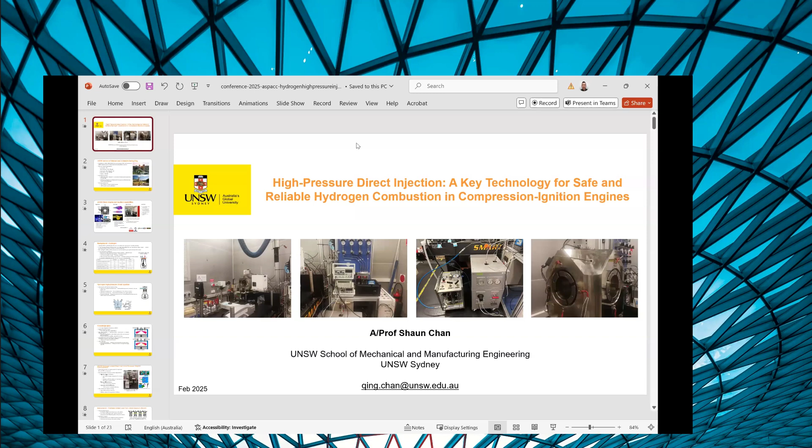Right, Fatemeh, many thanks for your very kind introduction. Are you able to see my screen? It's not in presentation mode, if you please put it on presentation mode. Just going to play around with it a bit. You may click on display settings. Yeah, thank you, perfect. Oh good, thank you, okay, all fantastic, good.

Thanks Fatemeh for your very kind introduction. My name is Shaun Chan, and I work at the School of Mechanical and Manufacturing Engineering at the University of New South Wales, located in Sydney, Australia. Before I start, I'd like to make a quick introduction to my school. It has a long history, established in 1949. Currently the school has approximately 100 staff members and more than 2,500 students across various programs. We are consistently ranked as one of the top universities in Mechanical and Manufacturing Engineering, both in Australia and globally. We are a highly research-intensive school, attracting more than 11.5 million dollars in research income, and publishing more than 400 research publications annually.

In terms of the group I work with, I'm one of the co-leaders of the UNSW Clean Engine Combustion Group, whereby along with two other colleagues, Professor Shawn Kook and Professor Evatt Hawkes, we work with more than 10 HDR students and 3 postdocs tackling various aspects of clean energy combustion. We have the capability to perform extremely fundamental level research diagnostics, as well as practical level engine testing. We also have the capability to model a range of flames using fundamental tools such as direct numerical simulations, and perform practical engine modeling using commercial software such as Converge. We collaborate with a range of industrial partners, and some of the work presented today was done in collaboration with them.

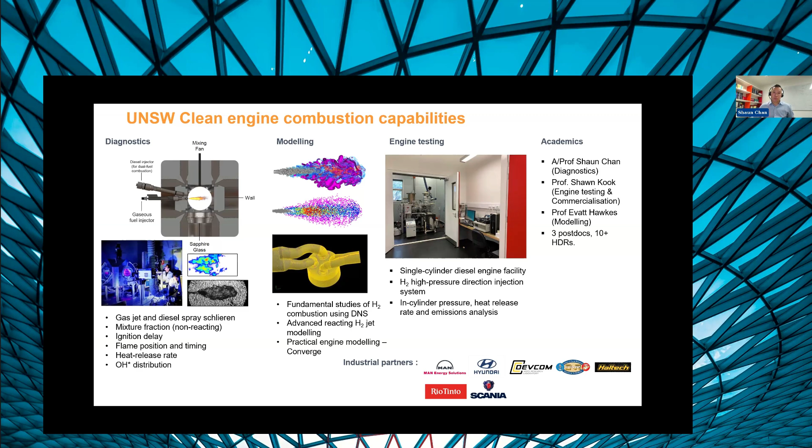Moving on quickly, I'm now going to talk about hydrogen after the brief introduction to the background.

Hydrogen itself is highly attractive, and one of the main reasons is due to its carbon-free properties, as well as potential to be produced from a variety of renewable energy sources.

As a combustion fuel, hydrogen is somewhat attractive due to several properties such as its wide flammability limit, as well as high flame speed. This can potentially lead to short combustion duration, as well as the capability to operate under lean operation conditions, which can be used to enhance the efficiency of the engine process itself.

However, hydrogen does have a couple of challenging properties, which makes it quite challenging when it comes to integrating it into engines for use. If we were to use a more traditional method, such as port fuel injection, whereby the gas is injected during the intake stroke.

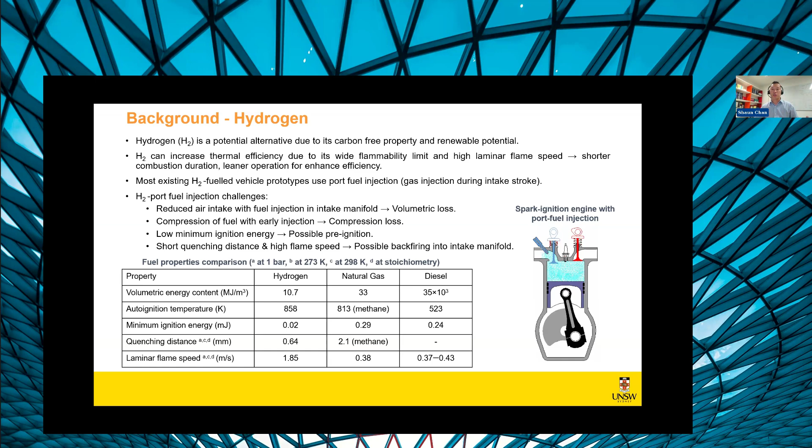So the occurrence of pre-ignition, backfiring, and other phenomena such as knocking could all potentially impact engine operation, and in more severe cases, cause significant damage to the engine itself. These are the number of challenges one has to face when trying to integrate hydrogen into an internal combustion engine.

Given all these different types of challenges, one potential approach to overcome some of the listed challenges is through the use of direct injection method combined with late injection timing. Direct injection, as its name implies, involves the direct injection of the fuel into the engine cylinder itself.

If we were to do this at a comparatively late injection timing, this will ultimately reduce the residence time of the hydrogen within the engine cylinder itself, potentially reducing its exposure to hotspots and deposits, and thereby reducing the pre-ignition risk. In addition, given that the hydrogen is now directly injected into the engine cylinder, this will ultimately mitigate the air displacement issues, such as described when it comes to the port fuel injection method.

Given that the hydrogen is now introduced into the cylinder directly, there's no backfire risk in the sense that the fire would now propagate back to its point of introduction, which is located within the engine cylinder itself. Last but not least, the late injection strategy combined with the direct injection method could be used to manage the compression work that's required to compress the fuel.

This also opens up different pathways when it comes to optimization of the performance of the engine, such as the redirection or reorientation of the injector just to enhance the performance of the engine itself. So these are the benefits associated with the use of direct injection strategy when it comes to the integration of hydrogen into engines.

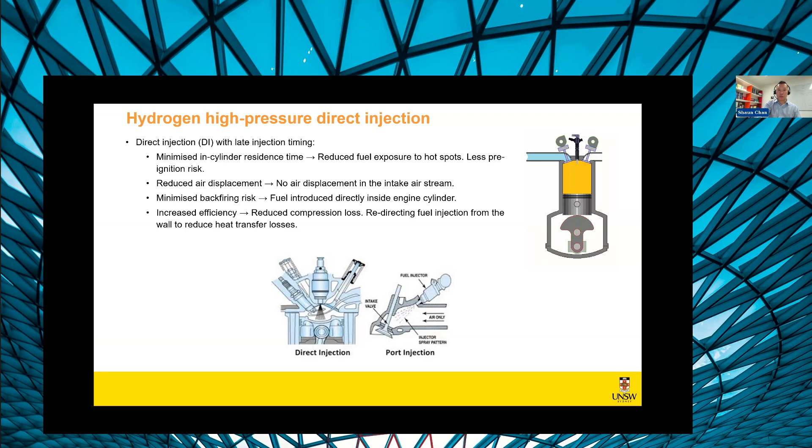Now, despite addressing many of the challenges through the use of direct injection, hydrogen itself still has a pretty challenging property, which is its high auto-ignition temperature that's considerably higher than some of the conventional fuels. What this basically means is that if we were to just directly inject the hydrogen into the engine, it would not be easy to compress and ignite it unless we make some modifications to the engine itself.

So a lot of the research groups, including my own, have looked into the use of alternative methods just to assist with the ignition of the hydrogen jet itself. Some of the methods include the usage of spark plug, glow plug, or in our group's case, we favor the pilot diesel method due to the competitive advantages that it offers.

The pilot diesel can be used to create a high temperature environment to facilitate the ignition of the hydrogen jet itself. The advantage of this method is that it's possible for it to create multiple ignition sites within the engine cylinder itself, thereby providing a more robust ignition performance.

In addition, given that we are using pilot diesel to ignite the fuel, it's also possible for us to increase the energy share coming from the diesel itself in the event whereby we increase the contribution from the diesel, should the operation require it. This provides the system with an additional layer of robustness to handle the different operation requirements that one may face, depending on the sector that you're working in.

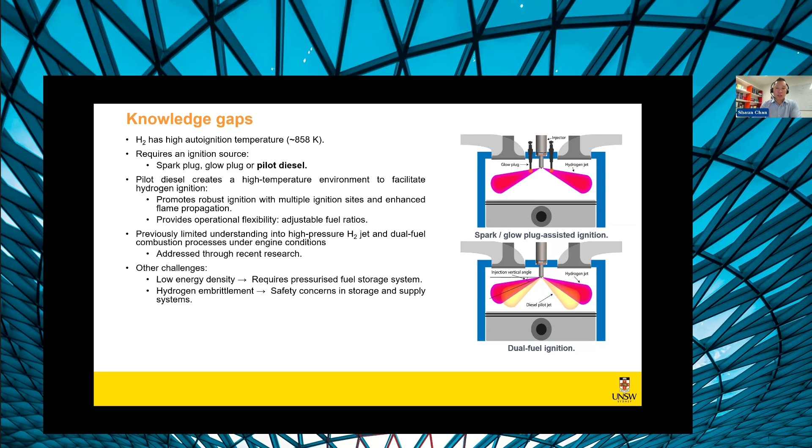Before we go into the technical details, it's worthwhile looking back at what we could potentially achieve if the technologies were implemented to their full extent. Our group has performed engine testing at the University of New South Wales, implementing the hydrogen diesel dual fuel direct injection technique. This demonstration was conducted in a compression ignition engine with varied bore sizes ranging from 50 up to 100 millimeters.

With our recent test, we were able to demonstrate that using this technology, we can achieve a high energy substitution up to 90% for hydrogen. In other words, 90% of the energy in this case is actually coming from the hydrogen, with the remaining 10% coming from the pilot diesel.

One thing of note is that this does not represent an upper limit of the technology itself, rather it's an indication mainly arising from the limitation of the injection hardware that we are using. There's no reason why we can't go further than what is currently demonstrated.

This 90% is approximately 2 times greater than what has been previously reported in the literature when it comes to the usage of hydrogen port fuel injection, whereby a typical upper limit of 30 to 40% has been observed over a comparative range.

Given this high energy substitution, we will also observe a significant reduction in terms of carbon dioxide emission, as well as an increase in the indicated efficiency as compared with the diesel baseline, which is probably attributed to these highly favorable combustion properties of hydrogen.

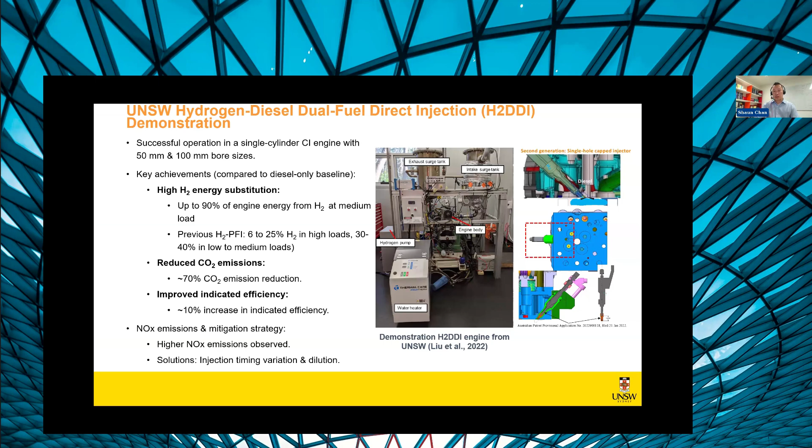With hydrogen, one of the main concerns would be NOx emission, and indeed, with certain injection strategies, we do observe an elevated level of NOx emission, going up to 3 times as compared to diesel baseline. But as we have demonstrated in our studies, with slight adjustment of injection timing variation, as well as the usage of other strategies, it's quite possible for us to maintain an efficiency and a NOx emission comparable to that of the diesel baseline, while retaining the significant carbon dioxide emission reduction ability of the technology itself, making it highly attractive for use.

When it comes to conventional fuel, the fuel ignition is mainly triggered through the compression within the cylinder itself, whereby the occurrence of ignition is largely dictated by the fuel type, the timing at which the fuel is introduced, as well as the engine parameters itself.

Now, when it comes to dual fuel compression ignition engine, given that we are introducing this additional fuel into the system, sometimes with the use of a separate injector, this opens up a variety of parameters that we have to control, adding a layer of complexity to a certain degree, but also providing us with the opportunity to optimize the engine performance even further than what we were able to achieve with the conventional compression ignition engine.

Some of the parameters that now become variable include the timing and injection sequence - when do we introduce the fuel relative to one another, and in what sequence should we be introducing the fuel. There's also the injection duration - through variation of injection duration, we can change the energy share coming from each fuel, which is one of the most important characteristics of this technology, something I'll discuss in detail in the subsequent slides.

The jet interaction angle would be important as well when it comes to dual fuel combustion, given that the hydrogen in this case does not ignite on its own, and its ignition is largely reliant on the contact between the pilot diesel and the hydrogen itself. So all these are different parameters that can influence the combustion performance of the dual fuel process.

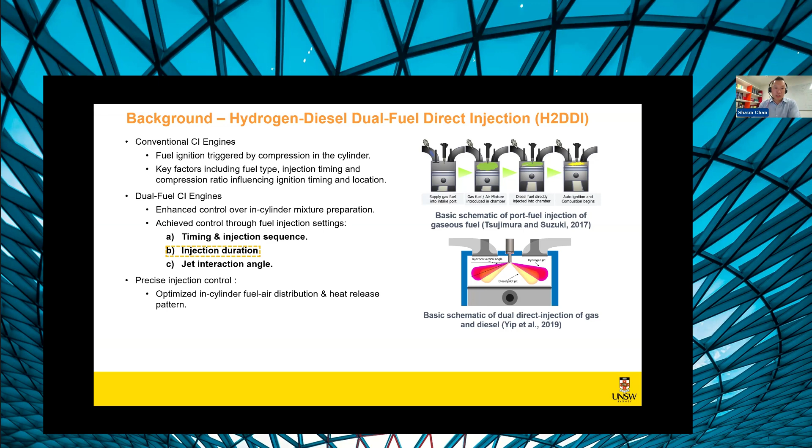I'm going to go through some of the data that we acquired in our laboratory. And before I do that, I think it would be a good idea to give a brief introduction into some of the techniques that we're using.

What you see here is the constant volume combustion chamber that's optically accessible. This chamber can generate the high temperature and pressure conditions that one typically expects to experience in the model engine range. The jet fuel of interest will subsequently be injected into these high temperature and pressure conditions that have been simulated within the chamber itself.

The technique that we're using here is known as Schlieren imaging. It's essentially comprised of the introduction of parallel light rays through a series of optics, which are subsequently directed through the combustion volume chamber before the parallel lights are eventually projected onto the high-speed camera itself.

When the fuel gets injected into the chamber, the high-speed jet prior to ignition, we can actually trace the perturbation that it introduces to the background signal to understand how the jet is developing. On top of that, when combustion occurs, this leads to the generation of gases of different density compared to the background, so the presence of the density gradient will deflect the parallel light away from its original path, and this manifests as dark contrast when captured on the image.

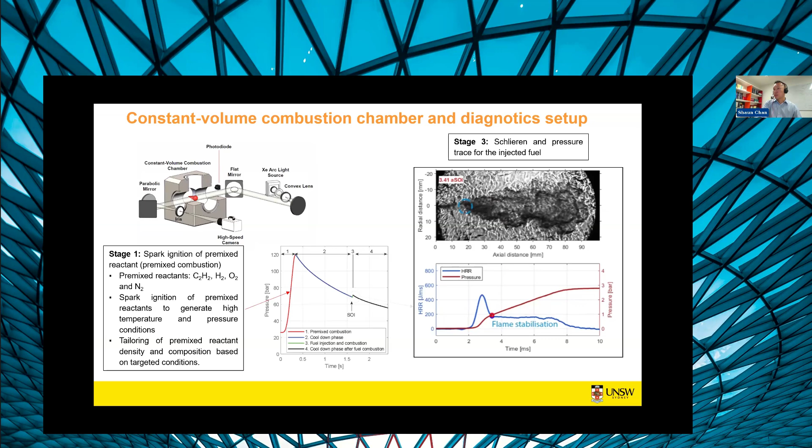When it comes to studying dual fuel combustion, we are essentially injecting both the diesel and the hydrogen into the same hot environment, but in this case we are introducing two fuels rather than one.

If you look at the video we acquired, the hydrogen comes into contact with the diesel that's injected at a slight angle with respect to the horizontal axis, and upon contact you see the flame subsequently propagating throughout the jet.

More importantly, what's interesting here is that the combustion actually propagates all the way back onto the nozzle itself, which is different from what's typically observed with more conventional fuel. This perhaps suggests that this propagation of the flame back to the nozzle during the injection period indicates a stronger, higher heat transfer from the hydrogen flame back onto the nozzle.

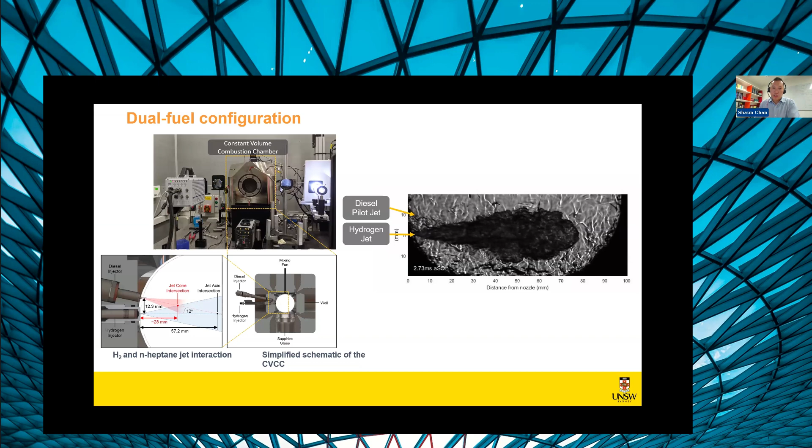This is something we have to bear in mind when running the engine using this specific technology, because this increased heat transfer could potentially impact injector durability, so that's something we need to assess.

There used to be a lack of data, but this has been addressed through some recent research efforts, some of the findings which I'll be sharing in the subsequent slide.

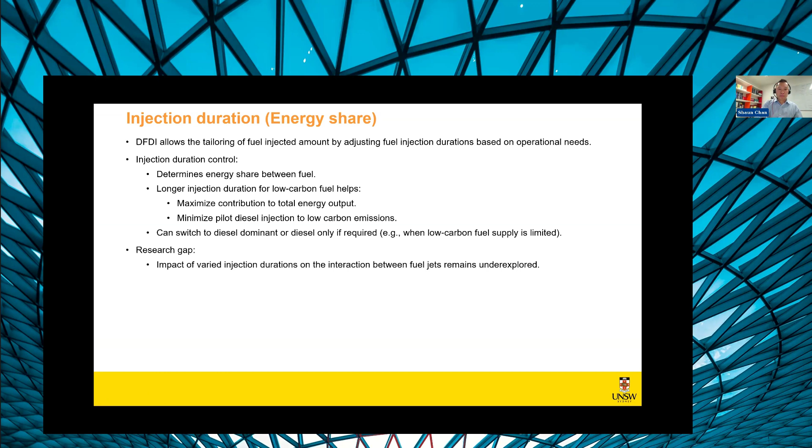For this specific set of experiments, we conducted it in a controlled constant volume combustion chamber. In this case, we fixed the total input energy into the chamber while varying the energy share coming from each of the fuels.

Given that there are different types of parameters that could impact the performance of the combustion process, it's important to minimize the effect of these other parameters as much as possible. So in this case, we maintained a converging configuration while ensuring a near simultaneous injection strategy.

We have conducted the experiment over a range of oxygen concentrations, but in the interest of time, I will only be presenting results acquired under 21% oxygen concentration. For comparison, we have also acquired some reference cases, namely single fuel injection cases under similar conditions, just for cross comparison.

All these cases are conducted under an ambient condition of 5.2 megapascal, as well as an ambient core temperature of 890 Kelvin. For ease of reference, we have come up with acronyms whereby the numerical numbers after each letter indicate the energy share coming from the different fuels. H90D10, for example, would indicate a case whereby the energy share coming from hydrogen is 90%, with the remaining 10% coming from diesel itself.

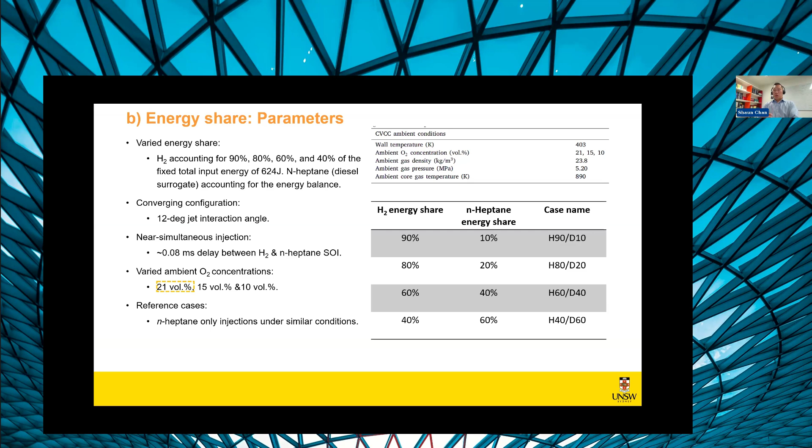Now, what you see here are the Schlieren images, as well as the apparent heat release rate profile coming from each of the cases. The cases located at the top correspond to the case whereby most of the energy share is coming from hydrogen, whereas the image located at the bottom corresponds to the case whereby most of the energy is coming from diesel itself. All these experiments were conducted under an ambient condition of 21% oxygen concentration.

If we look at the Schlieren videos that have been captured, what's interesting to note is that under the conditions which produced this data, the diesel will actually ignite externally to that of the hydrogen jet. This basically implies that under the configuration and ambient conditions we selected, the ignition of the diesel jet will not be impacted by the presence of the hydrogen jet itself.

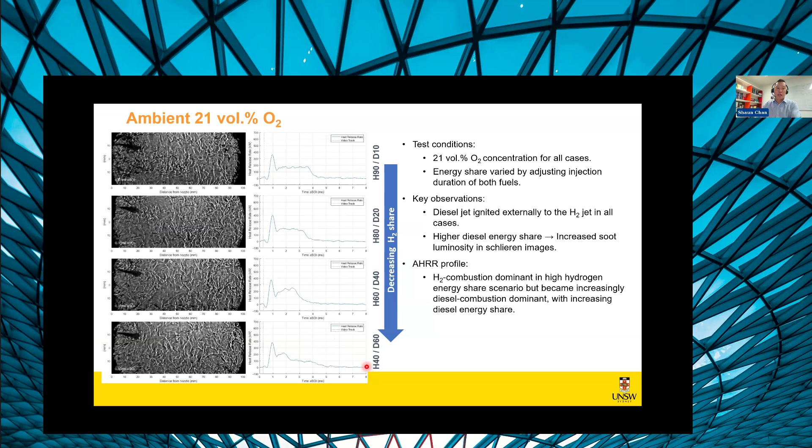One thing of note is that under the conditions whereby a majority of the energy is coming from the diesel, you actually see a lot more luminosity, which is typically indicative of the presence of soot. This is something to be expected given the carbon intensiveness of the diesel jet itself.

If we were to analyze this on a frame-by-frame basis, instead of just looking at the videos, we're going to be looking at the frames. Again, the schlieren images presented at the top correspond to the case whereby a majority of the energy share comes from hydrogen, whereas the case at the bottom, a majority of the energy share comes from diesel. The schlieren images shared from left to right correspond to frames acquired as a function of time after the start of injection.

The blue line here indicates the boundary of the non-reactive hydrogen jet. The red line indicates the boundary of the pilot diesel jet in this particular case. The green line corresponds to the boundary of the reactive cases. What you see on top are the images captured for the dual fuel cases, whereas what you see at the bottom are the single fuel references injected into the same conditions as the dual fuel cases, but without the presence of hydrogen. The yellow boundary you see at the top is pretty much an overlay of the boundary of the single fuel reference on the dual fuel cases, just to ease visual comparison.

If we look at the images selected for more detailed analysis, one interesting thing is that in the case of single fuel injection, you see the formation of a luminous zone at the head of the jet, which gradually diminishes over time. Whereas in the case of the dual fuel cases, the interaction of the diesel jet with the hydrogen jet would actually inhibit and reduce the amount of luminosity that can be detected. This suggests that the interaction of both jets could have an impact on the combustion as well as the soot processes itself.

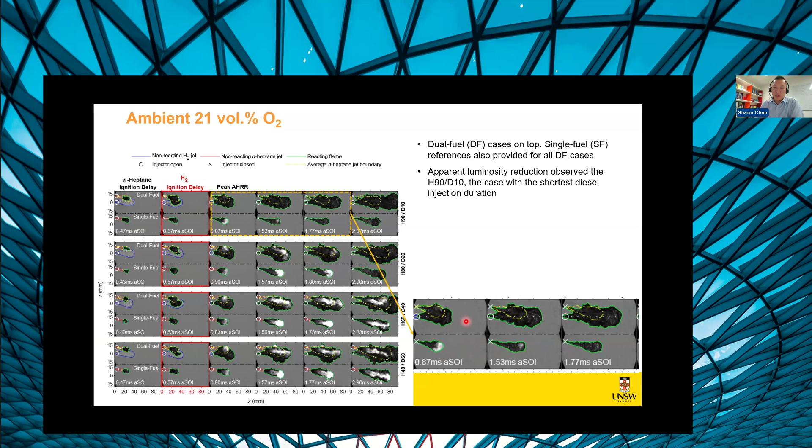In addition, if we focus on the measurements collected for the cases whereby a majority of the energy is coming from diesel, there are also a couple of interesting features. One being that in the case of the dual fuel cases, if we compare the distribution of soot relative to the single fuel reference, you see that the soot zone, the axial length of the soot zone, will actually be prolonged.

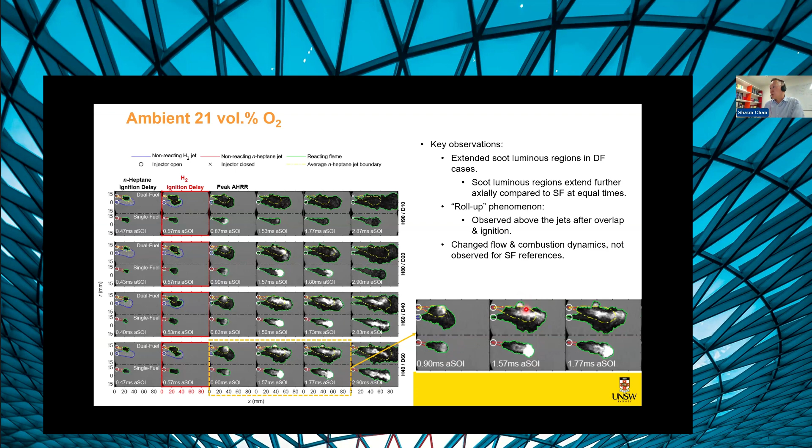And in addition to that, we are also seeing some interesting features being formed at the upper boundary of the jet itself. So if we play the video we acquired for this case and focus on the zone located right below the cyan arc, what you see is that upon ignition, there will be an upward counter-rotating region formed with certain luminosity that gradually diminishes as the flow structure moves downstream along with the jet itself.

This is something that's simply unobserved in the single fuel reference. And it's also not observed on every single run, but the frequency is comparatively high. The frequency does change as the ambient oxygen concentration changes as well, so the frequency of detection actually diminishes as the ambient oxygen concentration drops.

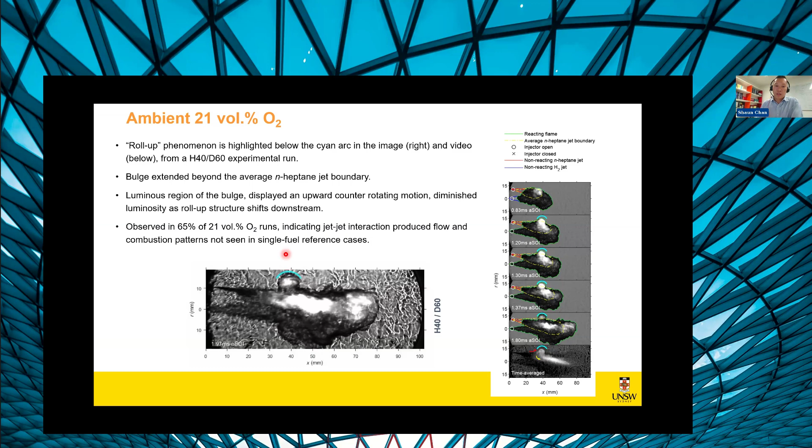So all these are demonstrations of how these dual fuel processes could potentially impact the mixing as well as the combustion processes of the dual jet, and something we should pay attention to when using them in the engine itself. I'm just going to go through one last set of results prior to ending my presentation.

So in this case, a series of measurements have been collected for different cases. On the left, you have all these measurements conducted whereby a significant share of the energy is coming from the hydrogen. And at the other end of the spectrum, this is a case whereby a significant share of the energy is indeed coming from the diesel itself.

Intensity in this case measures the luminosity coming from the flame. A higher value is typically indicative of a greater amount of soot, and vice versa. Last but not least, we also track the evolution of the flame base, seeing how it's stabilized with respect to the nozzle.

Now, one thing that's interesting is that if we look at the dual fuel versus the single fuel reference, what we see here is that the dual fuel process is actually a lot more efficient than the single fuel reference.

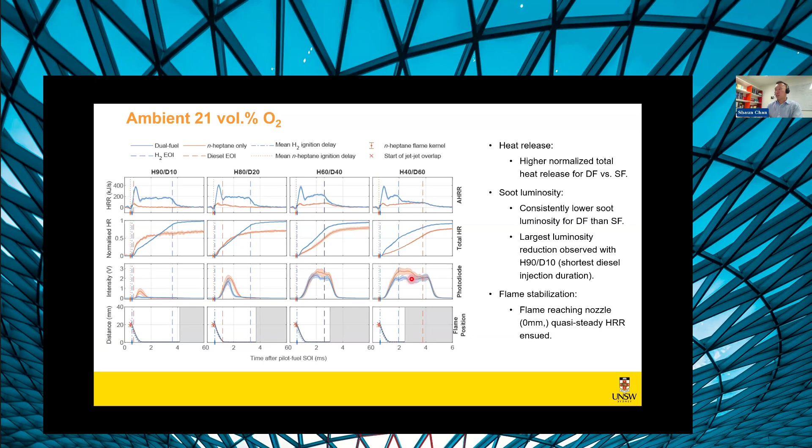When it comes to photodiode, what is interesting to note is that the intensity from the dual fuel cases is comparatively lower than what is typically observed in the single fuel references. This is despite the prolonging extension of the soot zone as well as the formation of the recirculatory zone. So these are the interesting features that we are observing.

So just a final quick two notes, I know my time is up. There are many questions on how this technology could potentially offer the most competitive advantage.

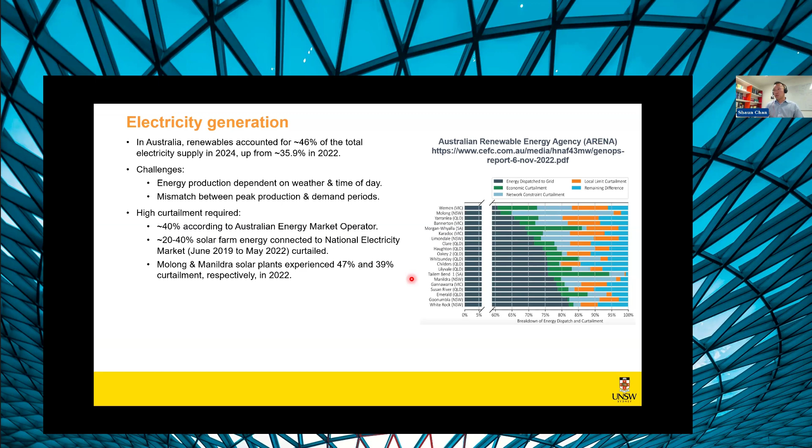One sector where this could be applied is electricity generation. There's increasing penetration of renewable energy into the grid in Australia, and many of these renewable resources are highly intermittent, with production highly dependent on weather and time of day. This has led to destabilization of the grid, necessitating corrective actions such as curtailment. Whilst curtailment is highly effective, it also leads to some kind of loss for the plant operators.

With hydrogen-diesel technology, in the case where you have excess energy, that energy can be stored as hydrogen. The hydrogen engine now offers a pathway at which this gas could be converted back into energy, to assist with grid stabilization, especially when there's a mismatch between demand and supply.

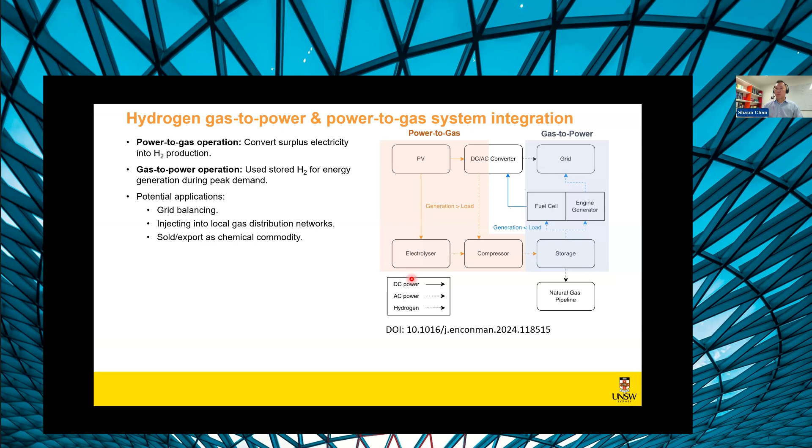Last but not least, this could potentially be used to assist with hydrogen export as well. Australia's national strategy is targeting global leadership in both production and export by 2030, and to achieve that it's important to find a cost-effective long-distance hydrogen transport solution.

One issue we face when transporting liquefied hydrogen is boil-off, where some of the liquefied hydrogen gets converted into gas during transportation. This can lead to over-pressurization, presenting a safety risk, and in most cases the hydrogen has to be vented off to maintain pressure, which represents another safety concern.

With hydrogen diesel dual fuel technology, there's a possibility that this boiled-off hydrogen can be used to fuel the motion of the ship itself, therefore changing the transport economics.

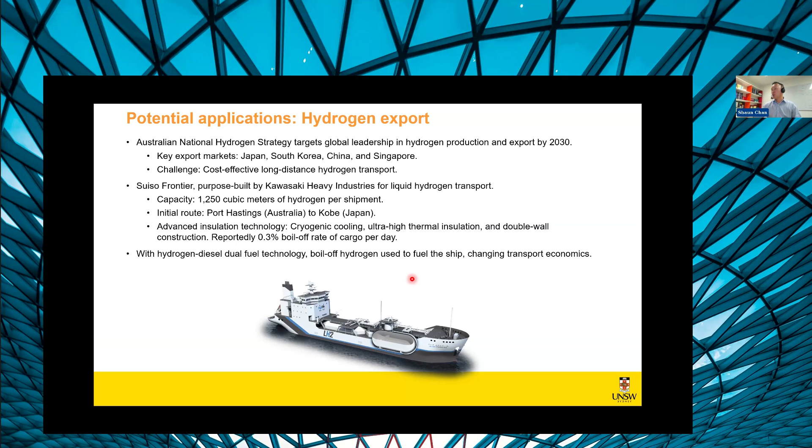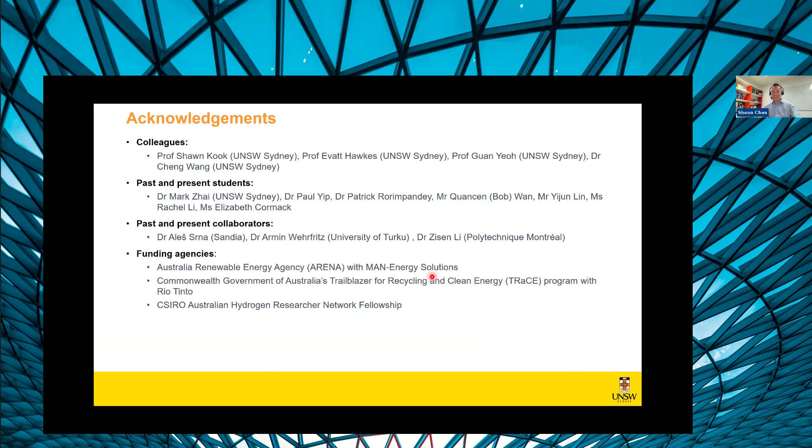Thank you. Thank you very much, Shaun. I appreciate it. It was an excellent presentation, and I've learned a lot.

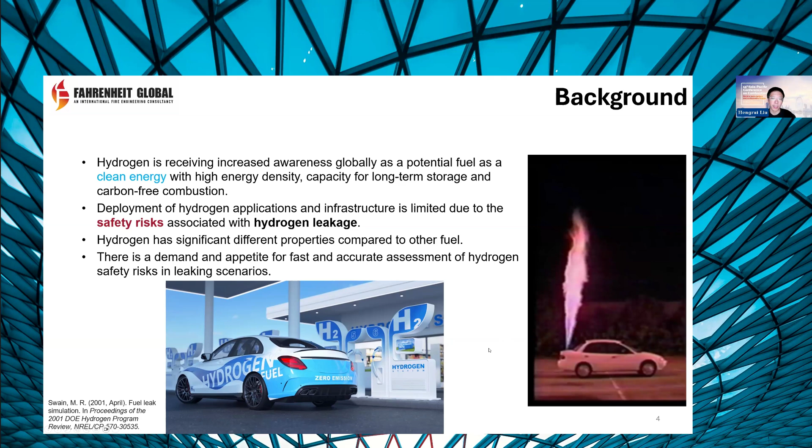So there is definitely a demand and appetite for a fast and accurate assessment of hydrogen safety risks, especially when we are wondering if they are leaking or not. So as I said, experiments lay our foundation for our numerical work.

We have a capacity of adjusting the lab to make a slope, basically in a tunnel scenario or in a chamber scenario, to have a bit of slope. And we have a capacity as well - sorry, I may not get my laser - right, we have also the capacity of introducing wind to model basically how to simulate a natural ventilation condition or mechanically ventilated condition.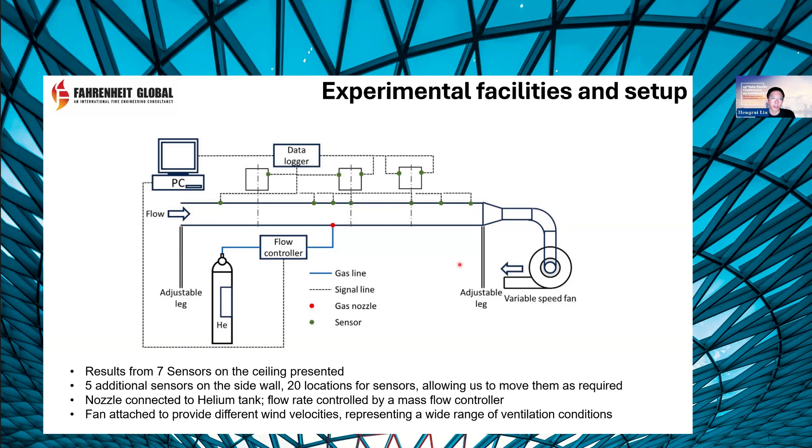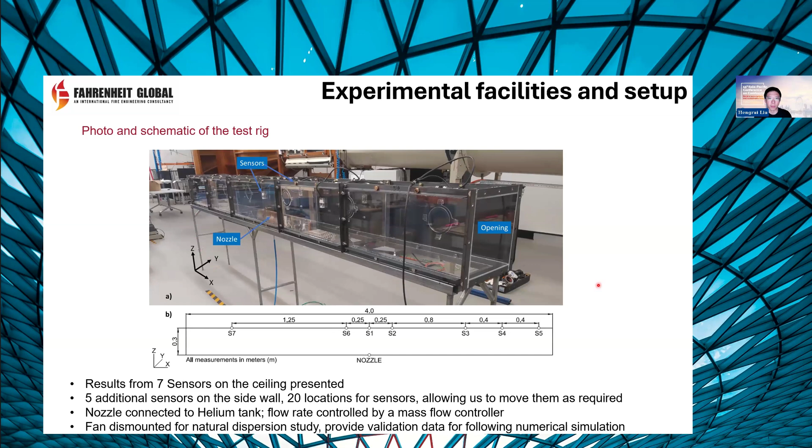So this is basically a photo of what you've just seen in the sketch. We have sensors, as we said, attached on the side of the walls and top of the walls. We have a nozzle connected to the flow regulator and connected to the tank as well. So here is basically the adjustable leg, we can use that to create a slope. And with the opening, whether or not we attach it to a fan, we can create a natural ventilation or forced ventilation scenario. And we've been using this experimental rig, the Macquarie chamber, a lot - that's basically formed our foundation for the next few projects.

First thing first, I'm a CFD guy, computational fluid dynamics. And most of our CFD analysis here I'm going to present today are done in cooperation with FLACS and with Gexcon. So FLACS is the software we're using, and it's specialized for hydrogen dispersion and explosion, and for other fields as well - dispersion and explosion. It's developed by Gexcon, and its beauty is that it's very easy to use, and they have a porosity distributed resistance concept, so basically you don't have to worry too much about your mesh generation and things like that.

Basically what it does is on the intersection or interface of fluid and solid of our obstruction, it makes a portion of that cell being accessible or inaccessible, which is the porosity, we call it here. And it's also having the ability of using a simple k-epsilon RANS model to have it computed more efficiently and suitable for this case as well.

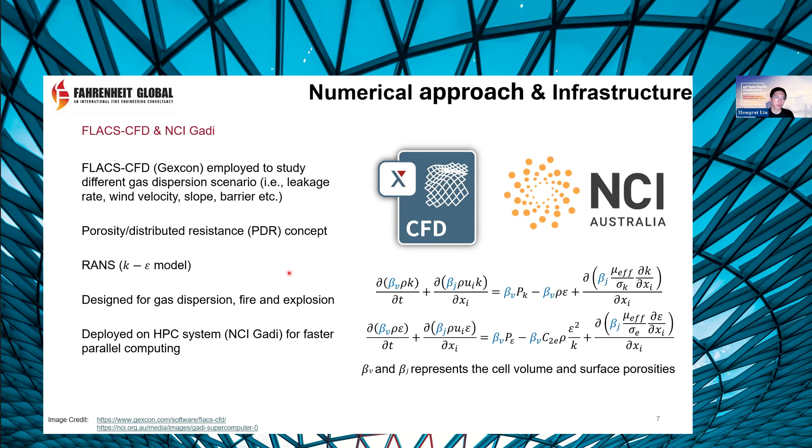And we are also using NCI Gadi as our computational platform. It's an HPC platform governed by the Australian government, and we should be able to deploy and run large parallel simulations on it, with the benefit of fast simulations coming in.

As always, we need to validate our simulation, and we do this using our experimental studies, as mentioned before. We use helium, and we are using a pure dispersion scenario, meaning we don't have any slope and no fan attached to the side. The gas, helium or hydrogen, is injected from the nozzle up here, and we let it disperse naturally. We use this very basic scenario as our validation.

As we see from the results here, surprisingly - or actually not surprisingly - the numerical data actually agrees very well with the experiments. We are having our error controlled within 10% in most cases. This is exciting news, basically meaning that our model works and would predict the flow scenario pretty accurately.

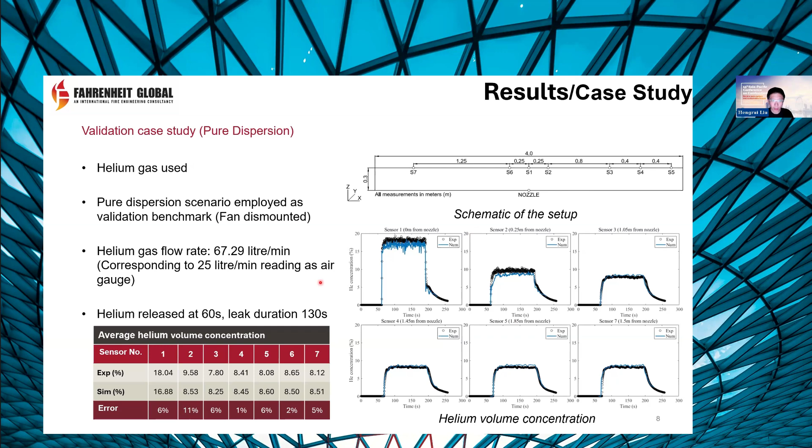And the beautiful thing about CFD is that we can visualize and obtain a lot of things that we cannot easily see in experimental studies.

For example, this one is the validation case study, the pure dispersion study. We can see as time goes by - I'm cutting the gas concentration at 4%, because that's the lower flammability limit of hydrogen. So when we see gas concentration above 4%, we know it's a dangerous zone with potential for ignition and explosion. So we see how the dispersion goes and how the dangerous or critical layer drops down and gets stabilized in such a scenario.

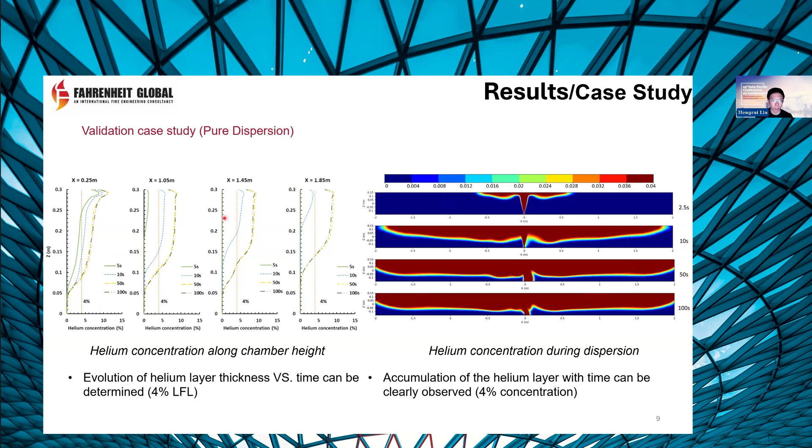At 2.5 seconds, it's just starting to disperse. At 10 seconds, it's basically dispersing around. At 50 seconds, it's already stabilized. At 100 seconds, you don't really see too much of a difference. We can also see at different heights and different locations of the cross section when it reaches that 4% critical line.

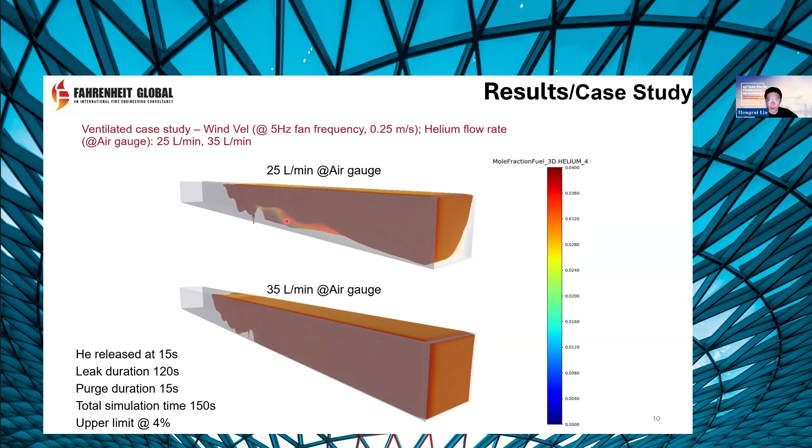That's our validation study, and as I said, with the beauty of CFD we can visualize a lot of things we otherwise cannot. We did not really expect that the ventilated case study would show not very symmetrical behavior in terms of the critical layers or how much of the chamber has been occupied by the gas. So if we go to the next one, we have this ventilated case study as well.

I'm just presenting a small ventilation velocity, and we can see whether or not the dangerous gas has been successfully purged from the chamber itself. We see that if we don't have enough velocity or ventilation, the second half or later half of the tunnel will still be in danger - it's a failed purge scenario.

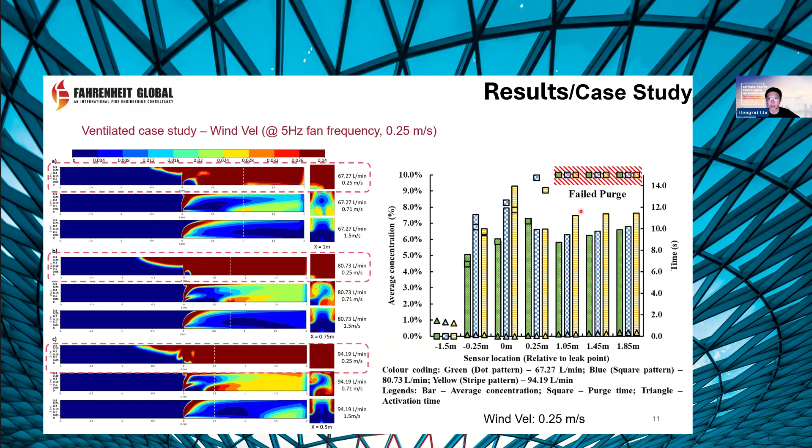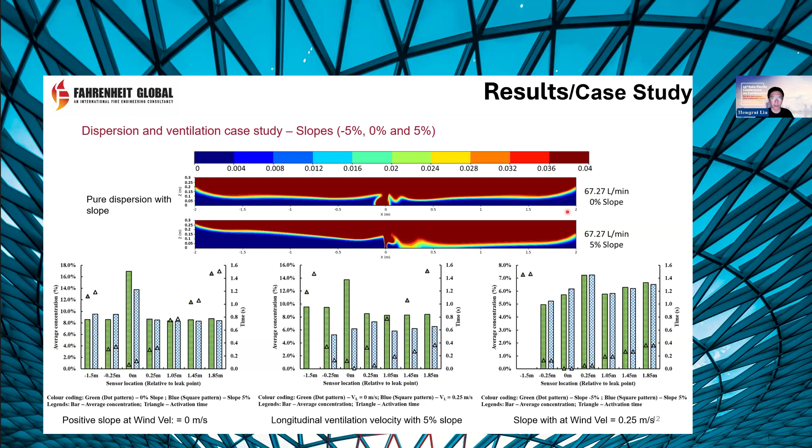During this study, and our own study as well, there are many questions asked. The main question is: how different is it, and is helium a good surrogate of hydrogen? What's the difference between them in terms of modeling and experiments, in terms of dispersion? Will that be critically different? As we see, hydrogen and helium basically differ in their density, and diffusivity is their major difference.

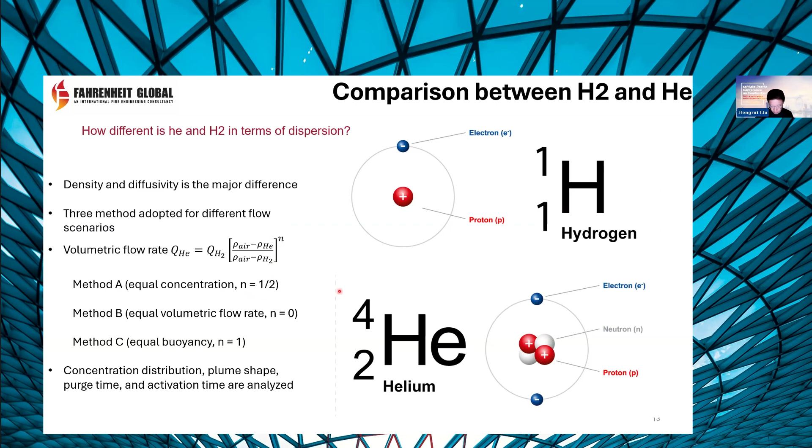So we did a numerical comparison as well, adopting three methods: equal volume, equal concentration, and equal buoyancy, by cleverly and smartly adjusting this n exponential number. This lets us compare the differences between helium and hydrogen. Here we see, in a pure dispersion scenario, hydrogen and helium don't really seem to have too much of a difference.

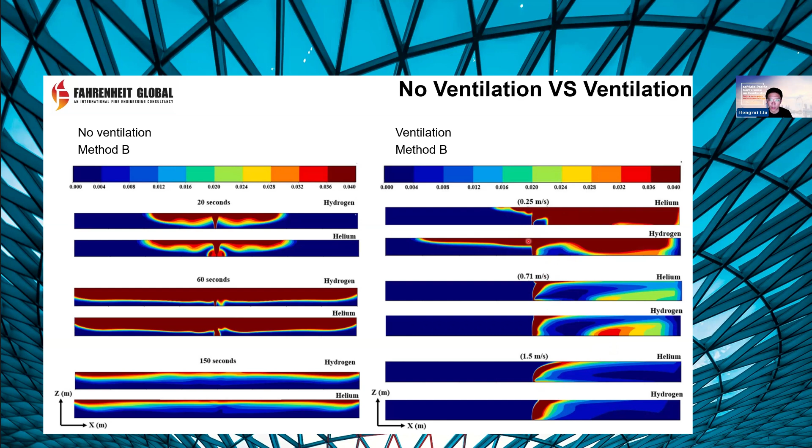In a ventilation scenario, you do see some differences, especially in different ventilation conditions. In a higher condition, you don't really see much difference, and even in a bit of a higher velocity condition, you don't see too much of a difference. But in a lower velocity condition, due to the much higher diffusivity of hydrogen, you will see a much higher concentration field upstream as well.

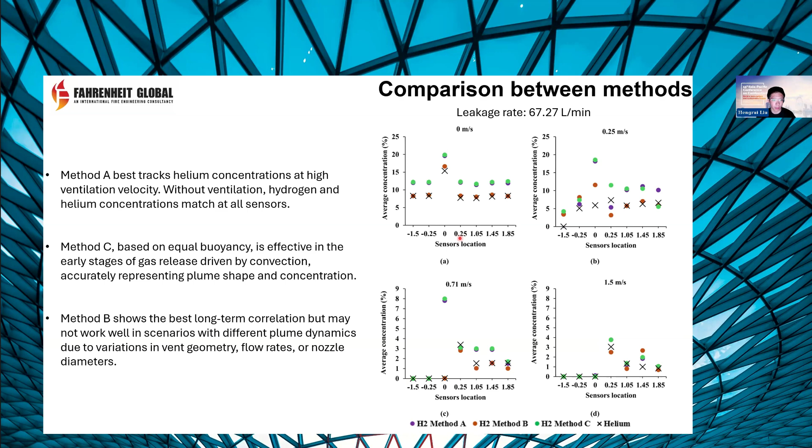Comparing methods A, B, and C—basically equal concentration, equal volumetric flow rate, and equal buoyancy—we find that in most cases method B, which is equal volumetric flow rate, is the better one to choose. But A and C work better than B for specialized cases, like if you're concerned with the beginning of hydrogen dispersion or gas dispersion, or if you're looking at plume shape or concentration, where C gives a better presentation.

We further expanded our study. We all know that CFD studies give a fast track and more potential for accessing data, but they still consume time and computational resources, and require more experience. So there's a need for faster predictive models, and we need a lot more data than what we can gain from experiments and CFD studies alone.

So we introduced machine learning, using data-driven models to help expand the database or data region we can work with, and to potentially give us fast predictions and insight into potential scenarios. We are using a low fidelity data model and a high fidelity model.

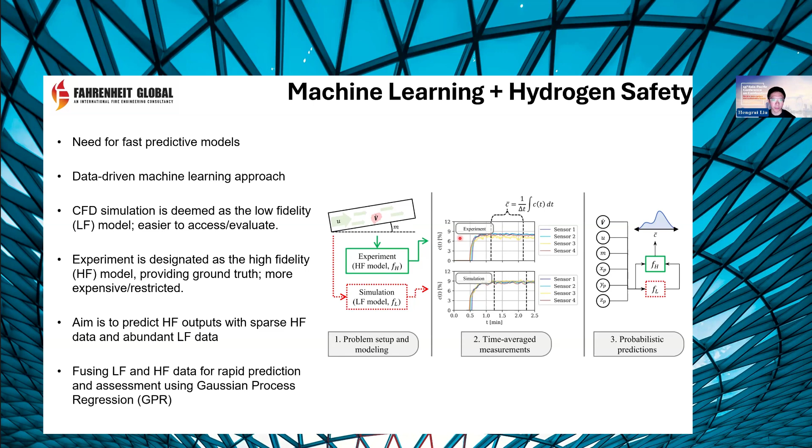As I said, the foundation is experiment. We consider experimental data as high fidelity and simulation as low fidelity. We use this model to combine, merge, and fuse all this data together, and to optimize the training method or our model to obtain a good prediction using a fusion of low and high fidelity data. Our aim is to use this data set to predict high fidelity data as well.

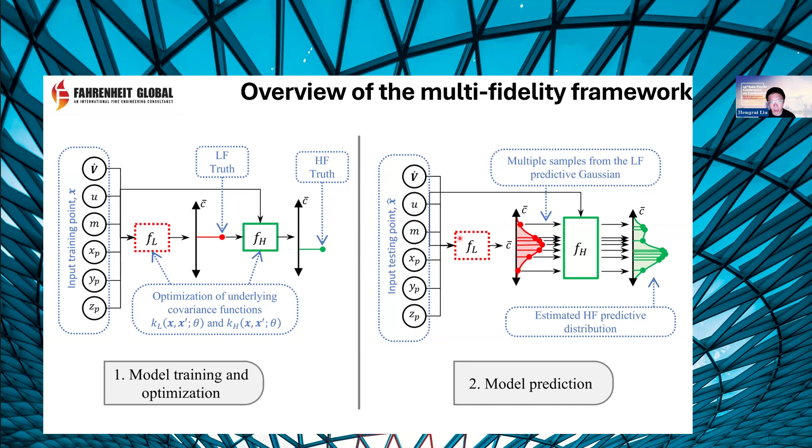In some cases we don't have the simulation run or the experiment done, but we still want this insight. Can we predict that from this machine learning model? The answer is yes—it's working great in some of the scenarios, definitely.

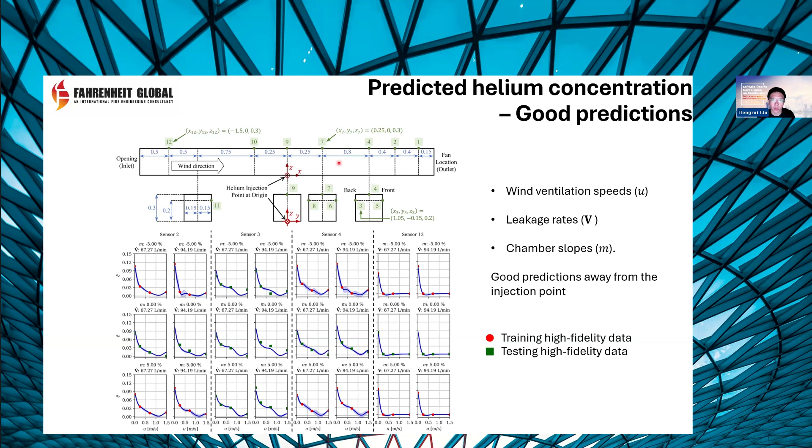As you see on the bottom, we're showing the prediction, and it agrees pretty well with both high fidelity and low fidelity data. It's making good predictions, especially when we are away from the injection point, where we don't expect too much fluctuation of the gas concentration or too much change in gradient. Around these points, we have a good prediction from the model.

However, as a model is a model, it has some limitations, mainly because of the gradient change and fluctuation—we may experience some inaccuracy. You can see the fluctuations, or uncertainty, between the prediction and the actual models, but it's still in very good condition. We still have room to improve, but it's already giving us a very good indication of insight.

And to give you an idea of whether it's worth going forward—whether it's worth it to do experiments or simulations.

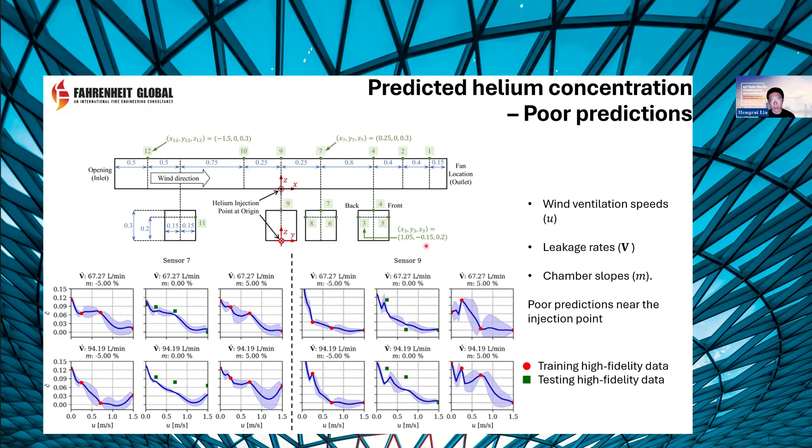Lastly, we expanded our study to more real-life scenarios, especially ones that are very challenging to actually do experiments on. Surprisingly, we're using the same picture—this hydrogen carrying tank on a ship.

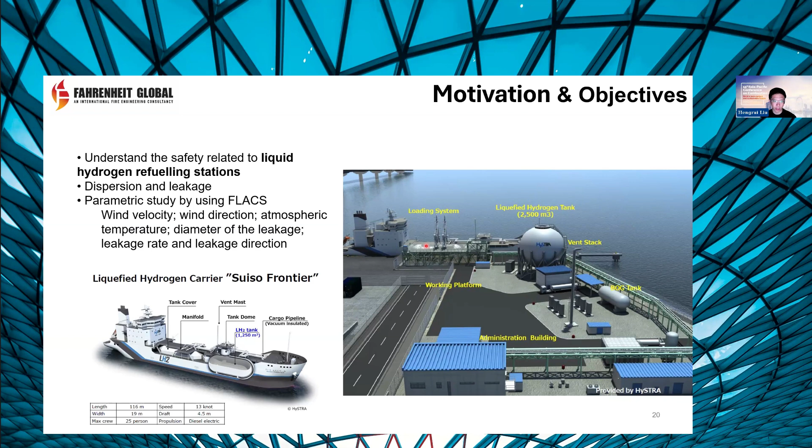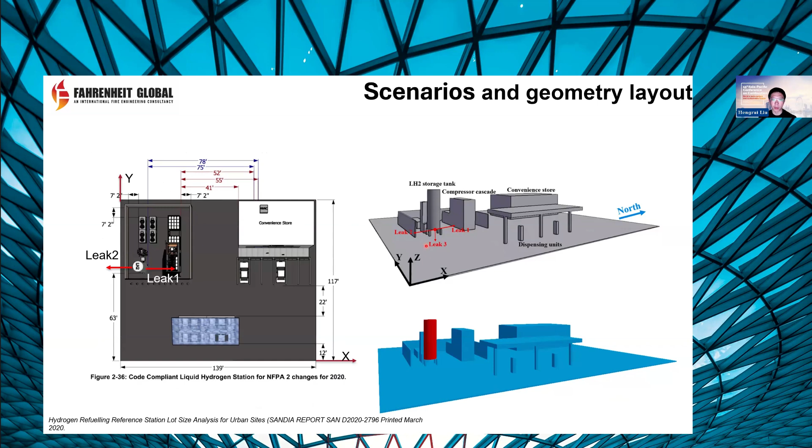So we have a problem of liquid hydrogen, which is cryogenic. How does liquid hydrogen in cryogenic, low temperature conditions behave if it leaks? How does this disperse, and how does it affect the overall safety and risk of the refueling station or the storage itself? In a simplified scenario, we considered leakage from different directions from the tank, and also considered different wind conditions coming from different directions, as part of our validation study.

Our validation studies show that our numerical model predicts reasonably good insights in terms of the dense gas behavior.

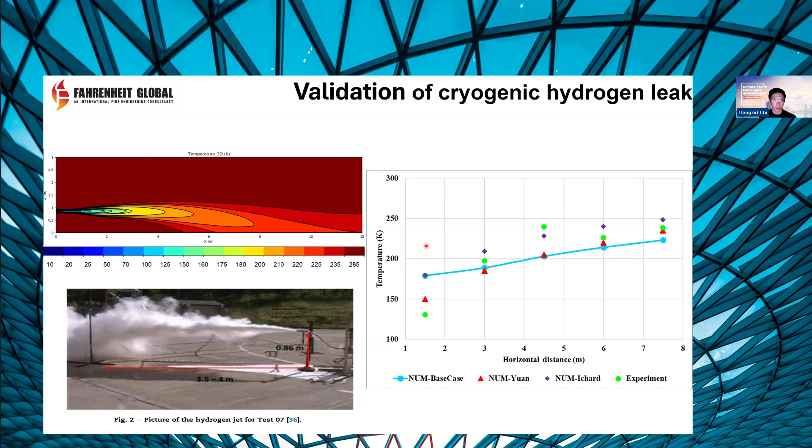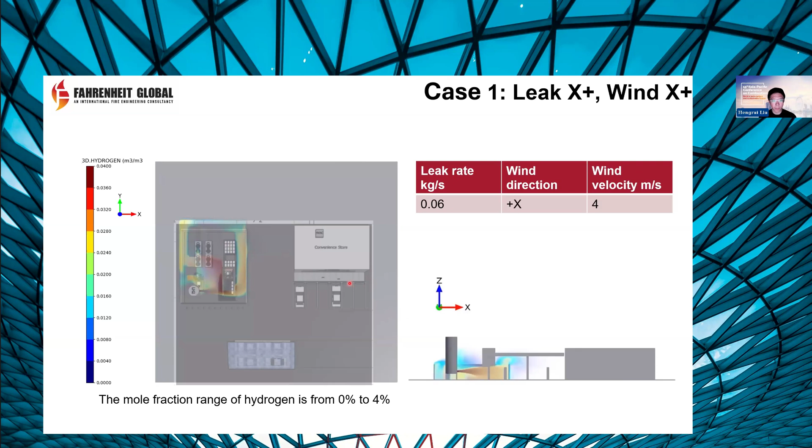Some simulations done here. We see that if we have the wind direction coming with the hydrogen leakage direction, it's been contained. Although we would expect leak out from the barrier, it's not really endangering too much of the other area surrounding the refueling station, so it's more contained within this barrier. But if we have a perpendicular wind coming through, we find a much higher spill, it goes past this barrier, so it endangers us. We didn't really expect that to happen, a bit of a surprise.

This is where the CFD can really play its beauty. When designing for these real application scenarios, we don't really have to go through expensive or even sometimes unrealistic experimental studies. It gives us insights in terms of how we guide our designs to be more safe.

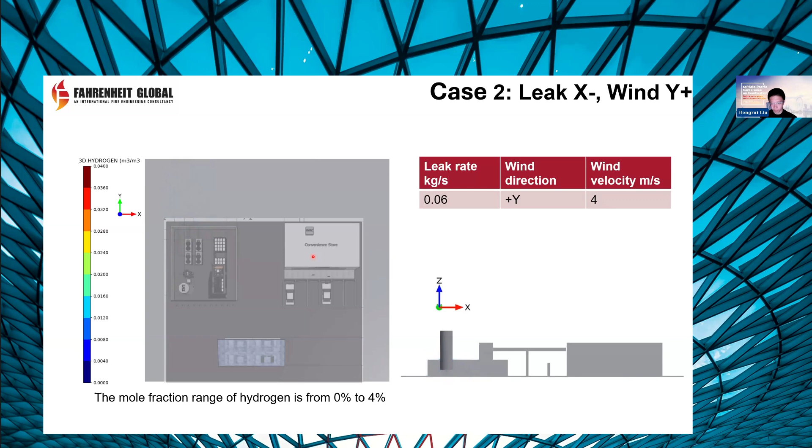That's pretty much the end of my presentation. I would take this chance to wrap up on what insight we've gained by these computational and experimental studies.

Experiments are important. As I said, they lay foundations. They give you an anchor point to know whether or not we are heading towards the right direction. But expanding from there, CFD offers us great advantage in terms of accessing data, visualizing data, seeing things we cannot really see easily in experiments. Much safer, much easier, especially when hydrogen safety is a huge concern.

I know that Fatemeh is pushing hard to really run hydrogen into the dispersion chamber, but we still have too many challenges. CFD is much safer for large-scale specialized purposes. We cannot easily use pressurized, liquidized hydrogen, which is more dangerous. So these concerns we don't have in the computer world anyway.

We have machine learning coming into play as well to expand our data set and to help us make quick decisions, to give us quick insights and directions on whether or not we further investigate. But keep in mind, garbage in, garbage out is a golden rule for the simulation world. We should always be taking care in developing the models, not blindly trusting this.

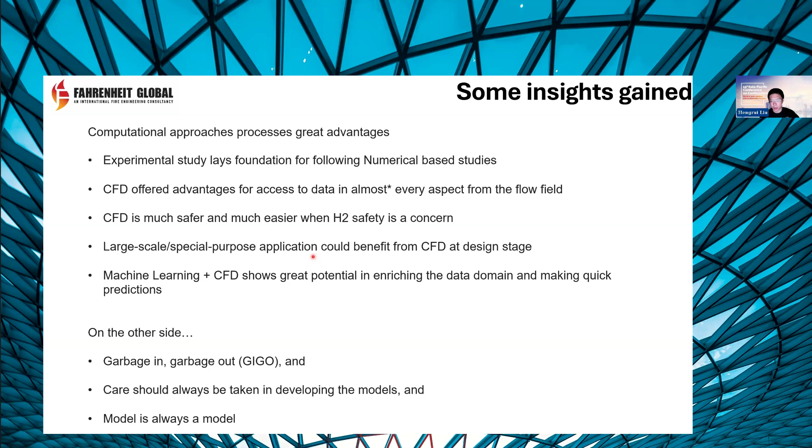Hopefully, publications aside, we can engineer a better world, and hopefully our skills and knowledge can be transformed or applied into real world scenarios, to guide our production and our real world lives in a much more effective way.

That's some insight that I gained in industry. So thank you guys for your time and for your patience to hear. It's a long night. Thank you.